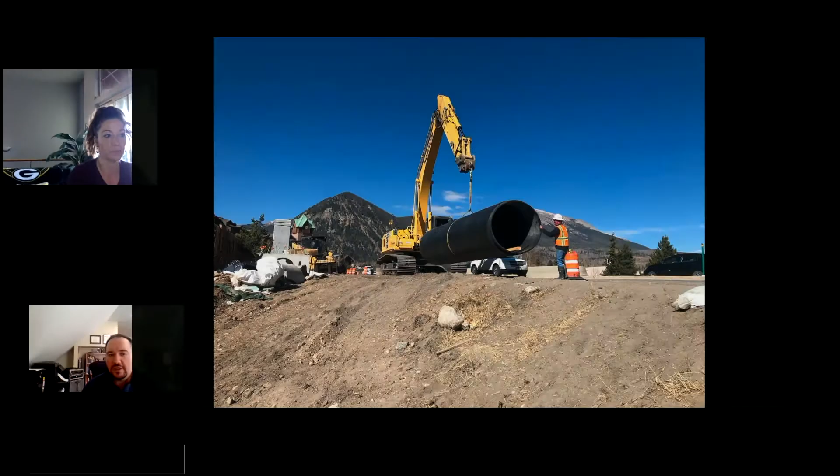Fish passage, aquatic life passage, which includes everything, salamanders, turtles, what have you. There's a variety of things that we can do, even within the slip line industry, to accommodate aquatic life. And it is a bit of a two-edged sword. It does get difficult at times for the designer.

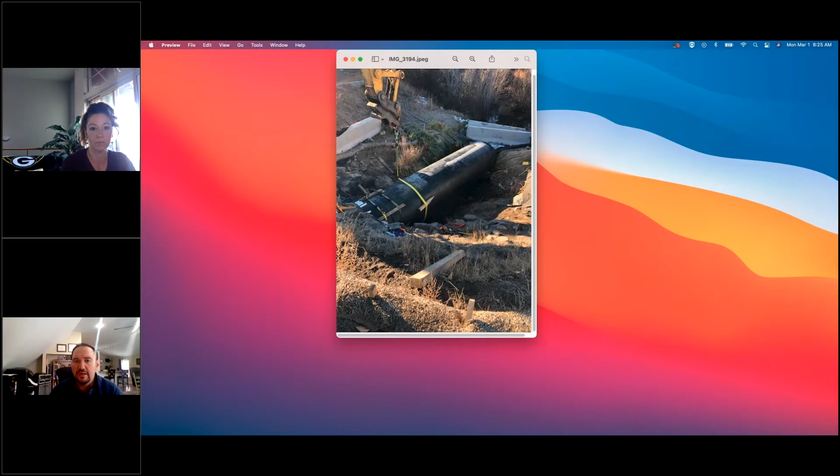Because oftentimes when we're talking about a culvert rehabilitation or a slip line, one end of it is, hey, I'm trying to get more flow, trying to meet flows. And the other end of it is, hey, I'm trying to slow down velocities and allow the aquatic life to get to where they need to be. So some of the things that Cassie and I are going to show you today will assist you in designing for aquatic life.

Awesome. So what you're seeing on the screen is a project that we were involved in this fall for the Colorado DOT. This was under a major highway leading to one of the most popular ski hills, so they wanted to get it repaired prior to ski season. So it was sort of a let's get it done quick before the snow comes. They didn't want any detours since this was the one road up to that ski hill.

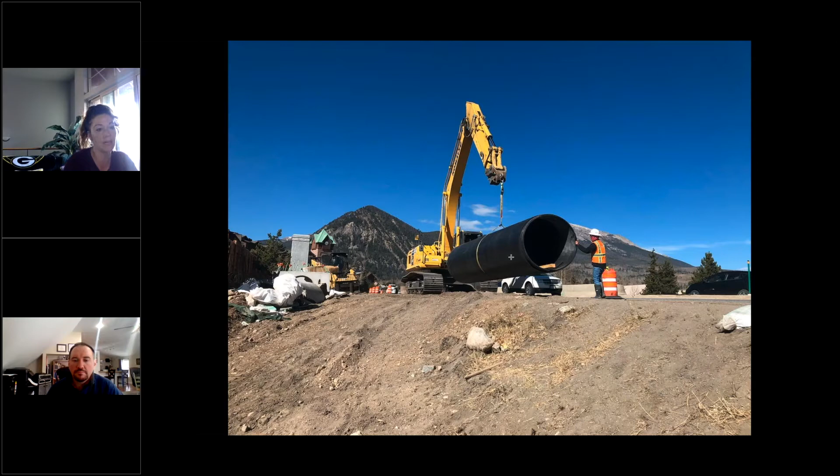So as you can see in the picture, right here, there are dissipators that have been welded inside the Snap-Tite pipe. I'm going to give you a closer look at that. Right here, you can see what that actually looks like blown up. The DOT had specified wanting them every 2 feet along the entire inside of the liner pipe. They didn't need them all the way up the side. They just needed them on the bottom to really slow down the velocity, as Dawn mentioned.

And Cassie, did Michael share with you what specific species, was it fish, was it salamanders, a little bit of everything? Mostly fish in this area of Colorado.

Okay, very good. And it was a fairly sloped liner. I believe the slope, and this is going off of my head, I would have to have my notes, but I think it was at least a 5% slope. So I think that was a major reason too, or it might have been over 5%, that they wanted the dissipators in there to really help the speed of the water coming through there.

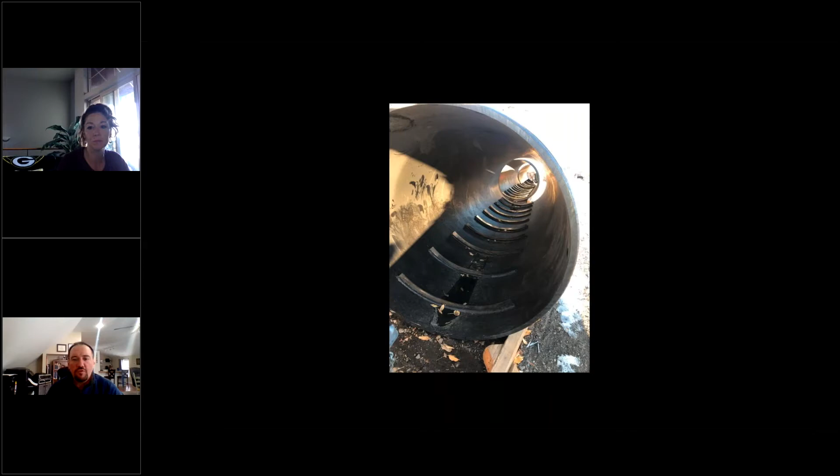Understood. So what do you got? Maybe a 4 or 5 foot diameter. That's a good size solid wall piece of Snap-Tite there, and so they're helping to slow down the velocities for the aquatic life. That was 63-inch Snap-Tite. Very nice.

Let me know, Dawn. I've got pictures of yours pulled up as well, so I can share my screen when you're ready for that. Sure. You want to show the PDF of the aquatic life passage pipe, as we call it? Let's look at that real quick because I've got that pulled up.

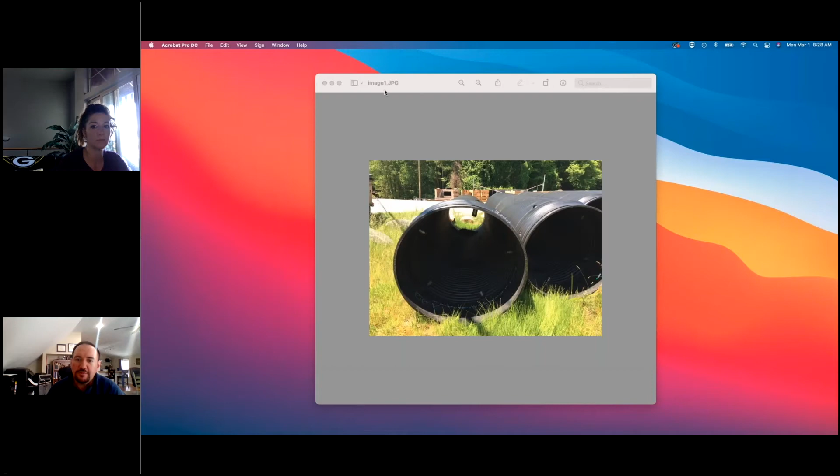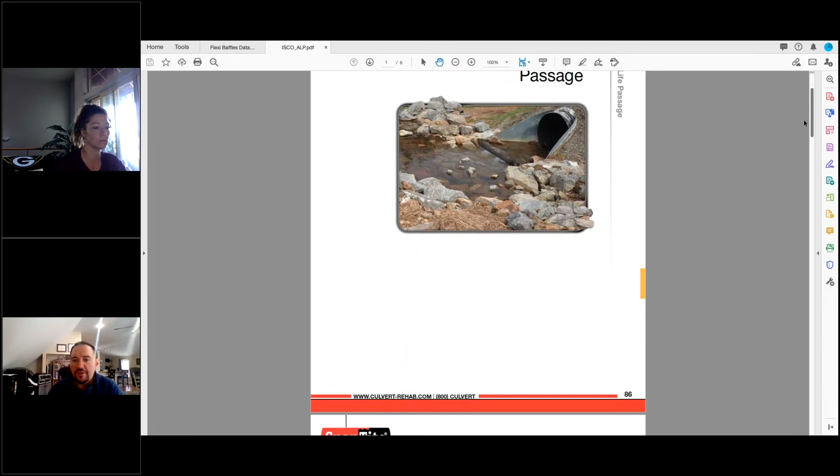Sure. So while she's looking for that, folks, aquatic life pipe, or ALP, we like our acronyms in this industry. It is a high density polyethylene product. It is a profile wall product, so it has makeup that allows us to do some fancy things with the inside of the pipe. Imagine your standard M294 pipe, but sort of imploded or reversed on itself. So instead of a corrugated exterior, it's a corrugated interior with a high quality resin product. So there's core tubes inside of a relatively smooth OD skin. So it makes for a really nice liner pipe.

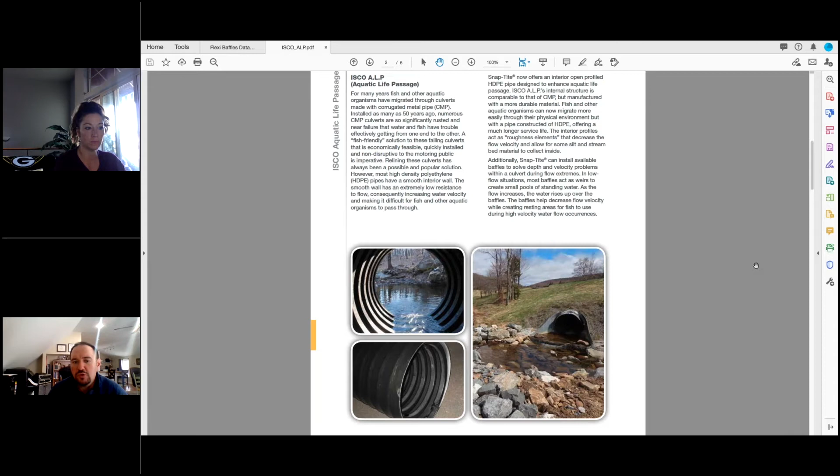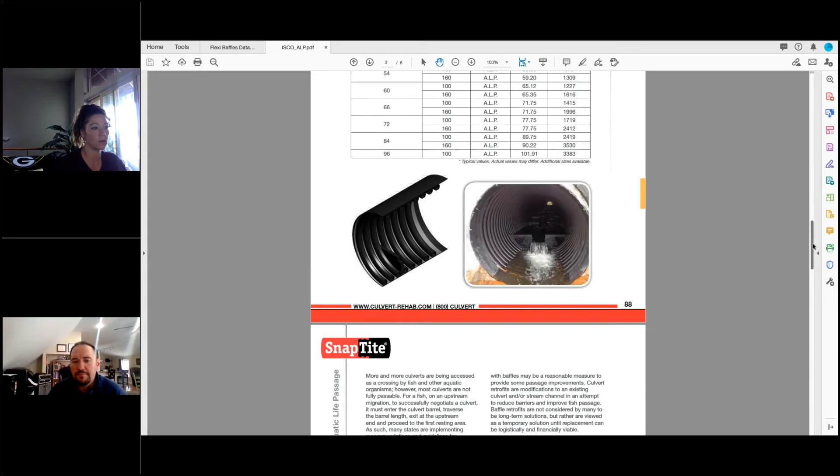Cassie, can you scroll down a little bit? Yep. Keep going. You can kind of see an isometric. Yeah, go down just a little bit and scroll right at the bottom of that page. Can you zoom in? Yep. Fantastic, thank you. So you can see on the left-hand side a CAD cutaway. So that's the ID of the pipe in that particular drawing. You're also seeing an additional baffle that's inside that pipe.

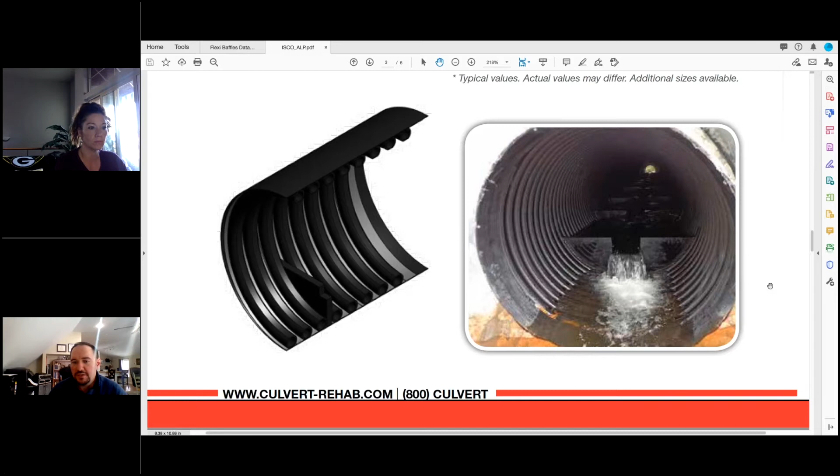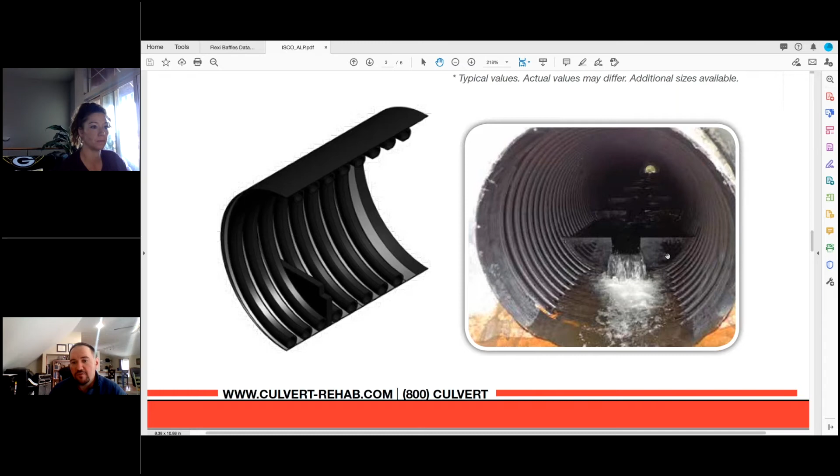And once again, just like Cassie described with the dissipators, this allows that velocity and energy, especially in low flows, to reduce and allow aquatic life or fish passage to work here. So in this instance, you see a notched weir that was probably, I don't know, maybe every 5 to 10 feet inside this liner as well. Makes a really nice pipe for velocity reduction. Right. Covered all the way from 30 inch, I believe, on the small side to 120 inch.

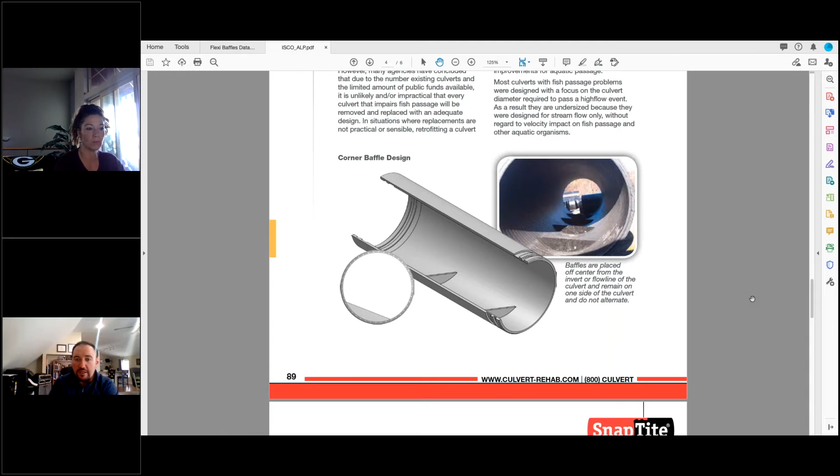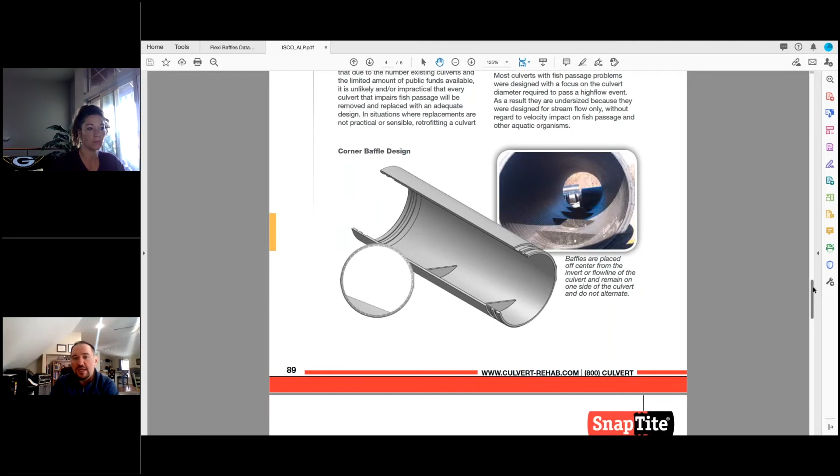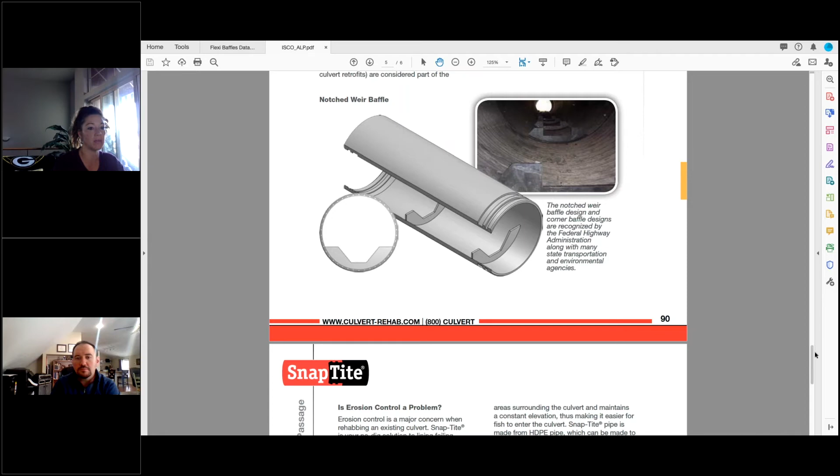So, a lot of folks use corrugated pipe, even corrugated aluminum or aluminized for direct bury. And I would dare say that you could use this pipe as well and truly get a 100-year service life out of high-density polyethylene with a corrugated interior pipe that allows you to establish that natural stream bed environment. Right. Yeah, I'm just kind of scrolling through different options so you guys can see some of the different baffles that can be designed inside of our pipes.

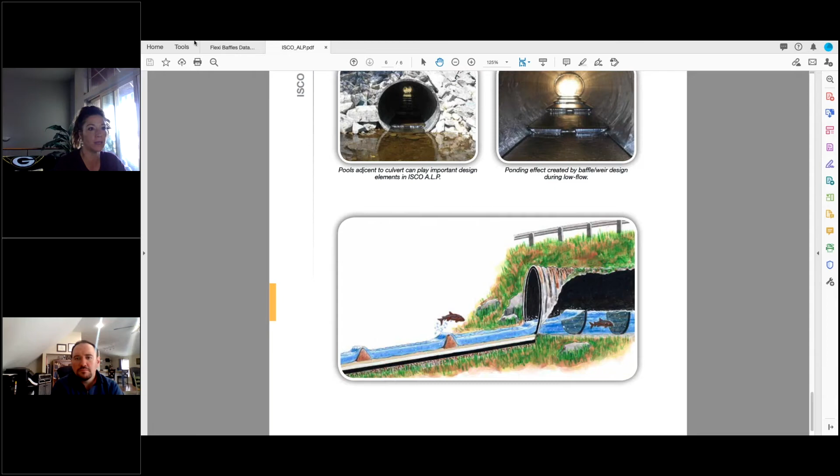And Cassie, you can see the fish jumping there in that illustration. If you go to that picture from Marlborough, Connecticut, a lot of the DOTs and the DEPs out here on the East Coast, especially salmon and trout communities. There's a picture, Cassie, showing the inside of a pipe there from Connecticut DOT. Let me pull it up. I got a whole bunch from you. So you're wanting the one that shows the close-up of the inside? Is that what you're thinking, Dawn? Yeah, it was right there.

There you go. So that's Connecticut DOT. That was some 54-inch, and then the subsequent pictures after that too, Cassie, are also the same pipe, I believe. Okay. All right, I'm gonna move each one of these over. Give me just 1 second. Yep, that one right in your background there. That's the same pipe, but you can see the entire thing now. So that's 54-inch pipe. Okay. It is a bell and spigot, Cassie, and that was a twin barrel.

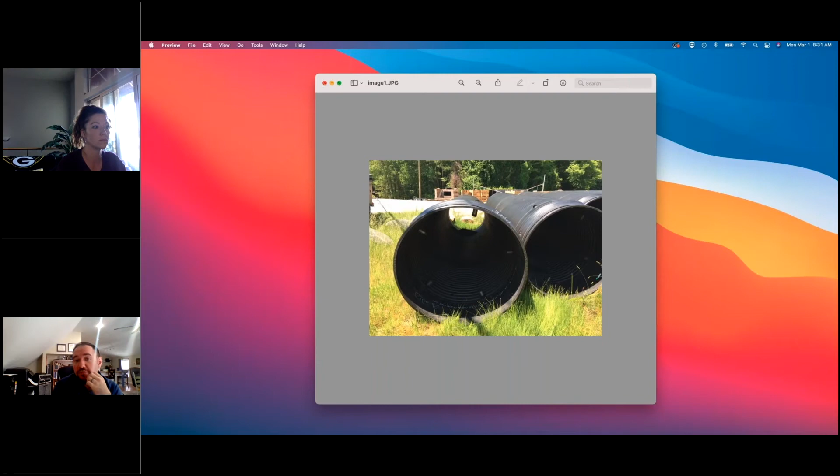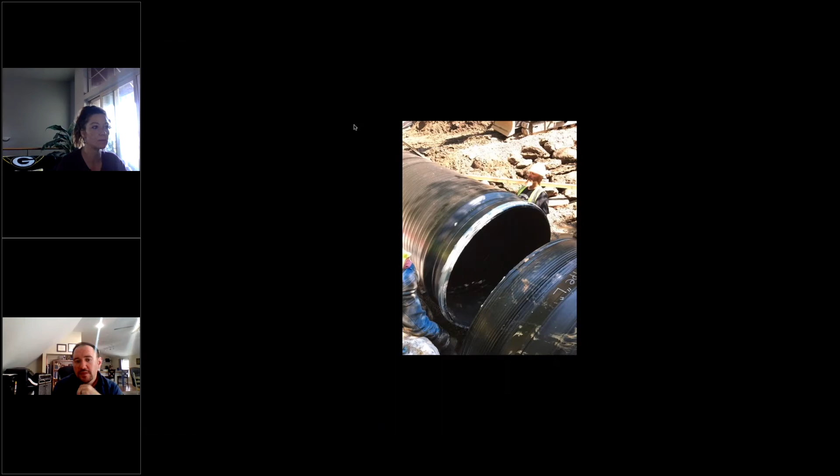I think each one was a couple 100 foot, and it looks really, really nice. All finished. That one's been in the ground for 4 or 5 years now. I'm gonna show them the bell and spigot. Yeah. Part of it. There you go. Yep. So that's that same pipe going together. It's a low profile bell and spigot, so it makes for a really nice slip lining pipe.

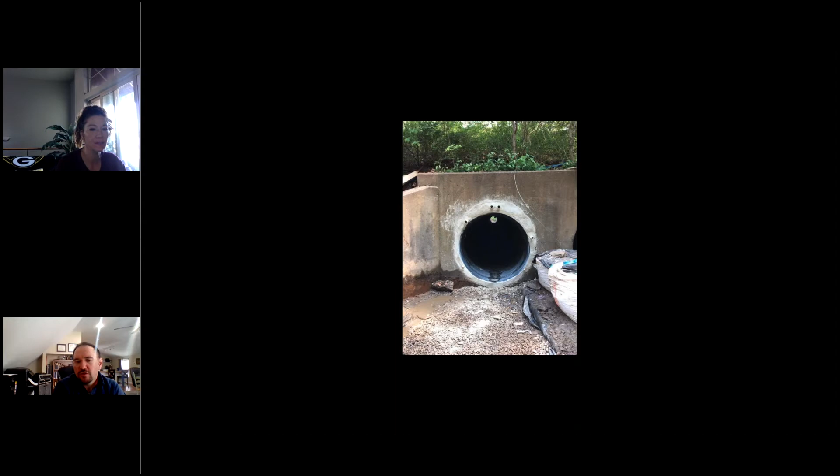And then here, I believe, is the finished product, right, Don? That's the one. Yep. So twin barrel. You can see they coffer dammed off the left side there, Cassie. Right. And then that was like 300 foot each, I think, or close to. And so that's a 66-inch host pipe that was in really, really bad shape. So we were able to accommodate. Well, that's actually a different project, which I'll talk about here shortly. Okay. I will put this one down.

So, the ALP is something I don't think we talk about enough as an industry, as a team, because fish passage, again, as you and I were talking at the top end, Cassie, it's such a hot topic. It's so important that we reestablish these stream environments for the aquatic life, and that's why I think when I do my presentations, I at least mention it on the forefront of the presentation nowadays, because so many people are asking, how do we accommodate the fish and the turtles and so on and so forth.

Yeah, we're getting the question a lot now, right? I mean, it's coming up. I think, especially in conversations in the Northwest. I know we're seeing a lot of it. Like I said, Colorado's very conscious of it. We've seen a lot of requests out of Washington and Oregon for it. So, yep.

Okay, let me know what you want me to pull up next, Don. I know we've got another project that I see pictures for in a box culvert. Yeah, we can show that one next, and we'll talk about the FlexiBaffle on the back end of the presentation. Okay. All right, I will pull this one up, move this over to my other screen. I'm bouncing between screens here, so.

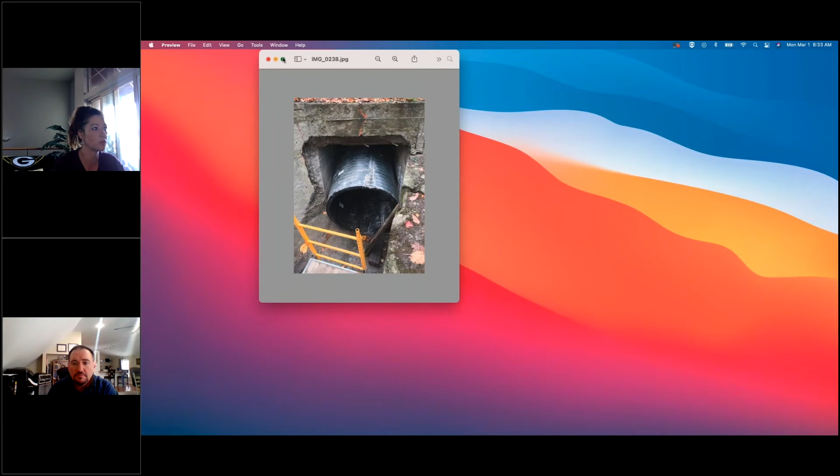Yeah, that's all right. So this actually, Cassie, is a similar idea. They put energy dissipators welded inside the pipe with extrusion welding. This was a New York DOT job. And this just speaks to the versatility of high density polyethylene and what we can do for not only aquatic life, but also for challenging projects.

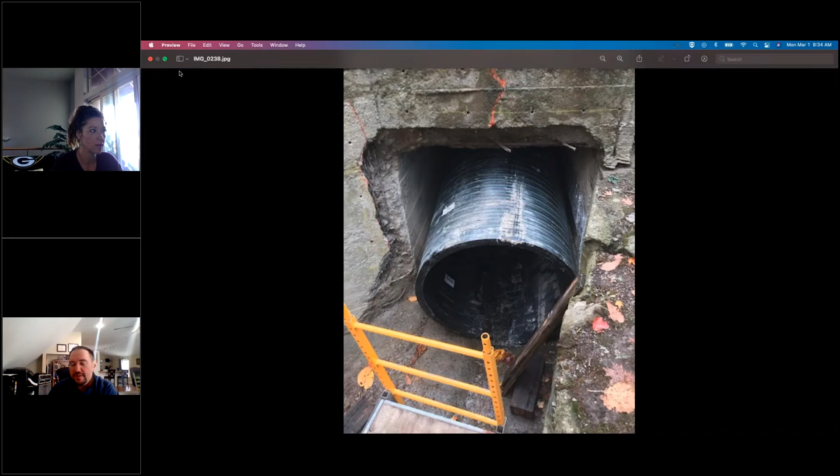This is a box culvert, Cassie, that not only had vertical pitch change to it, but also horizontal directional change to it as well. And if you go see how tight that pipe is inside that host pipe, that box, if you go to the next few pictures. Okay, I'm going to bring this one up on the screen because I think this is the one you might be referring to. Sure. It definitely looks like the same project. Can you zoom in? There you go. Yeah. So you see just a sliver of daylight. That's perfect. Yep, right where your cursor is. Yep, and I see dissipators in there.

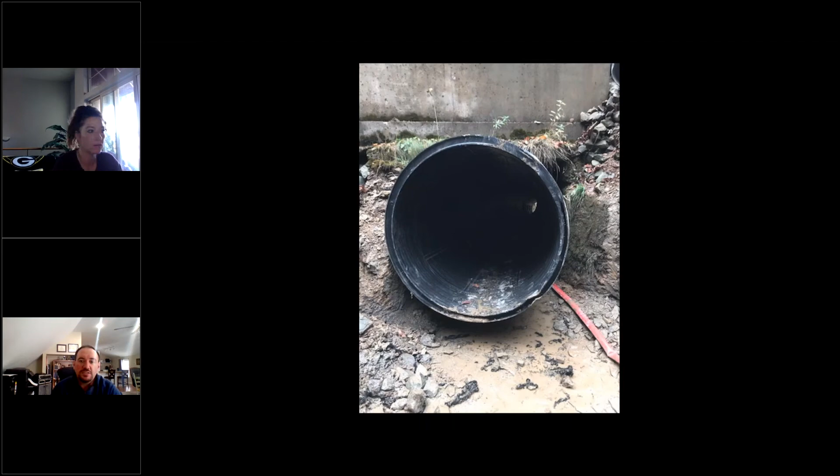Yep, so you can actually see based off the way the light is shining how that pipe bends through there. That is a welded connection that we did with the high density polyethylene. Right. Yeah, contractor did a fantastic job getting that pipe through there. And we didn't have to make up any fittings or anything. And we were able to accommodate that just by slip lining it from one end of the host pipe. And then there's another picture which really does a good job of showing the dissipators, Cassie. Okay, let me see which, there we go.

There you go. So very similar in Colorado there. They did a little bit more of the circumference. They came all the way up to like at the sides, almost, you know. Would this have been because they have more flow through the pipe than maybe they did in Colorado? It's quite possible, yeah. Plus there was quite a bit of slope change, and at the bottom end of this is one of the Finger Lakes, so they had quite a bit of energy dissipation to worry about as well, because there's a house with a velocity reduction pad and then the lake. Okay.

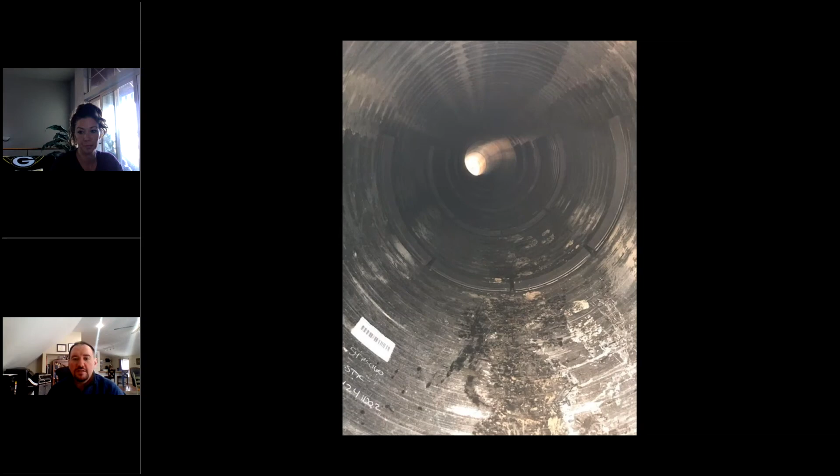Is there any other pictures you want me to pull up, or should I pull up this PDF? Yeah, let's talk about something that's relatively new to me. I'm not necessarily saying it's new to the industry, but this is something that's really unique. And Cassie, as you and I continue to look for a variety of solutions for the engineering community and for the DEPs out there, this is a really interesting individual that I've talked to.

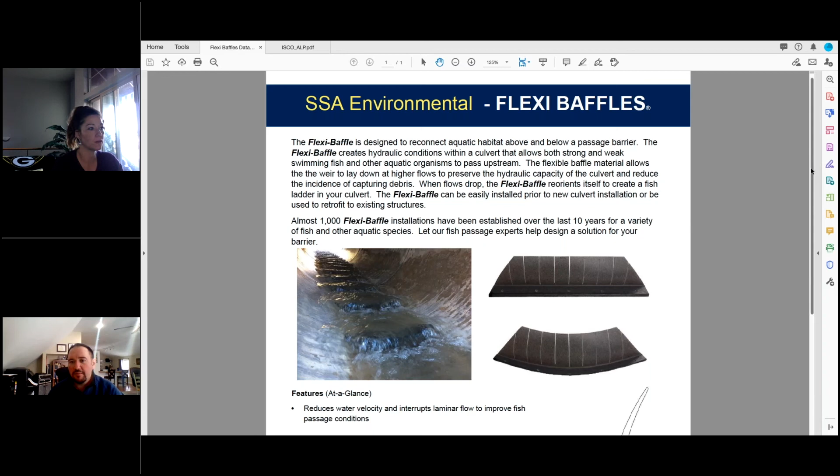I haven't met him in person yet because it's such a new relationship. But he's based out of Washington State, I believe. I just met him through various channels, called him up one day, and this individual knows a boatload about designing, not just baffles, but all kinds of things for aquatic life passage. So I'm going to be using him more for his knowledge in speaking with these consultants, Cassie, than anything else.

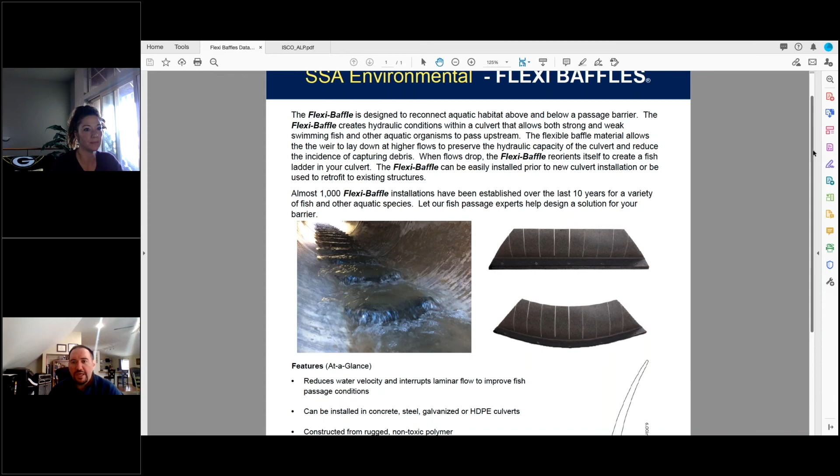Right. This is what he lives for. His passion is designing solutions for a variety of fish passage. He's got a bunch of really cool YouTube videos that show ping pong balls going through these culverts and watching how the velocity reduction happens at each baffle.

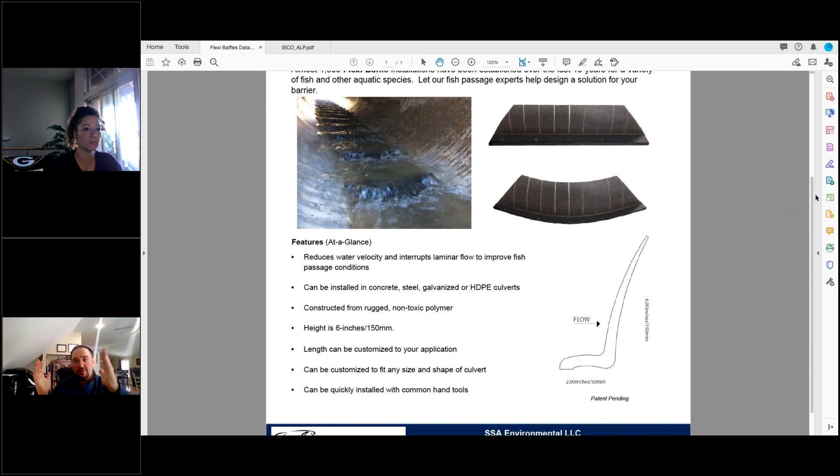Oh, nice. So this flexi baffle concept, Cassie, is kind of neat because, in short, it's meant to provide those baffled areas for the aquatic life during the low flows, but in the higher velocities, allow that open area to open back up because it's going to sit flatter during those higher flows, those higher velocities, right? So hence the name flexi baffle. It'll allow it to fold down and therefore open up your pipe capacity during those higher velocities. Right. Yeah, I see this. This is really cool.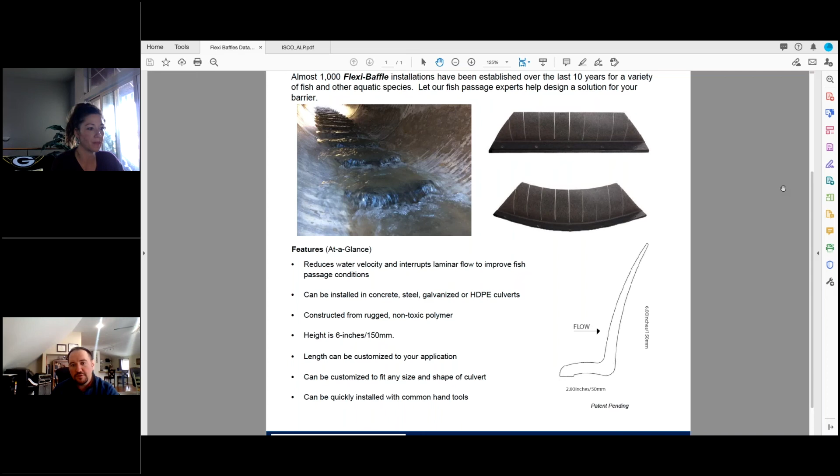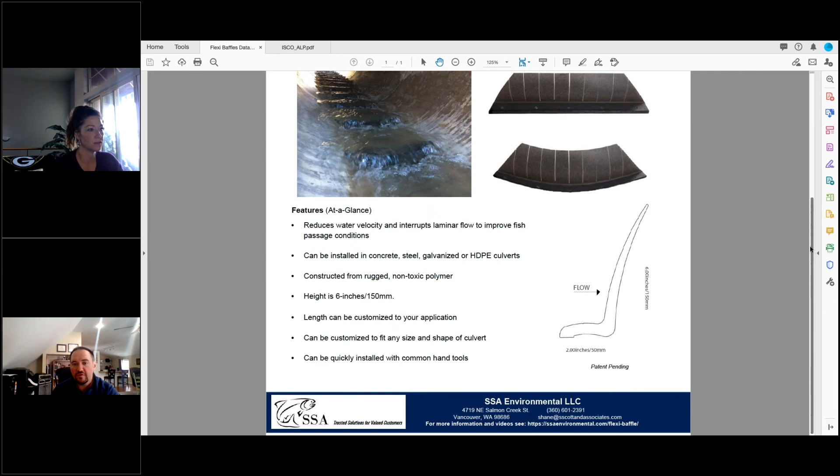So it's new to me, not necessarily new to the industry. These guys actually came from, I think, Australia, believe it or not. And the individual, that guy's company is listed there at the bottom, Shane Scott is his name. Okay. And he's got some really unique experience with mitigating fish passage.

I think I see a Reline Live with Shane in our future. I think that's a great idea. Yeah. Absolutely. Yeah, I bet we could do a whole series on that. Oh, absolutely. Without a doubt. So, well, this is fantastic.